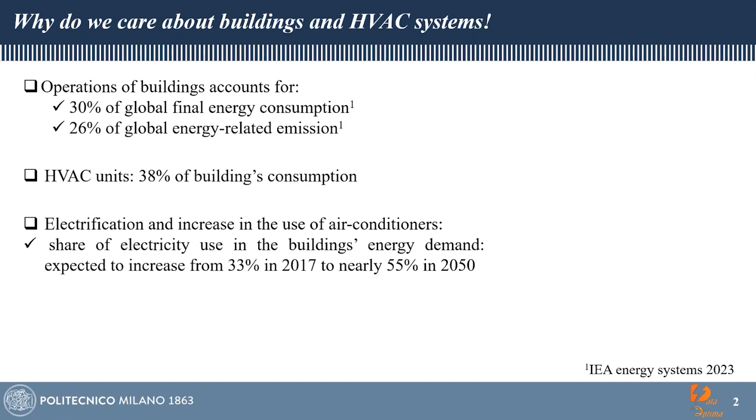And the problem is that it's getting worse, right? Because we are going to have some immigration toward more urban areas. At the same time, we also have - and that's what we're going to discuss next - an increase in the share of electricity demand within the final energy use of buildings. And this is due to the increased use of air conditioners and, of course, electrification.

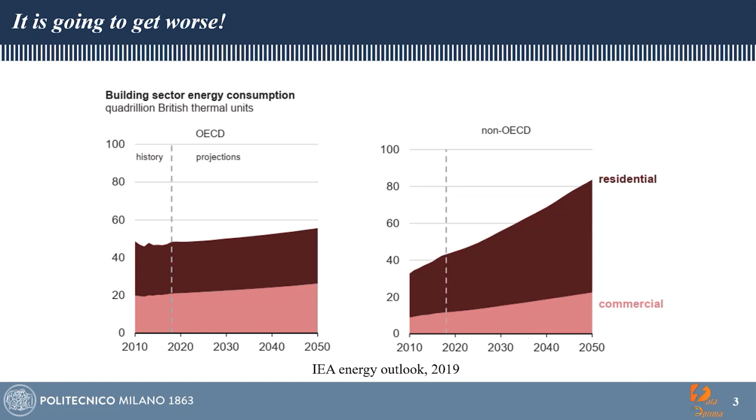So these are the projections. Let's first look at it from a global level. I'm using the energy outlook of 2019 because the values and projections haven't changed much, but I believe this representation was better for this purpose. We can see that the overall global energy consumption of buildings is supposed to increase substantially, specifically in developing countries.

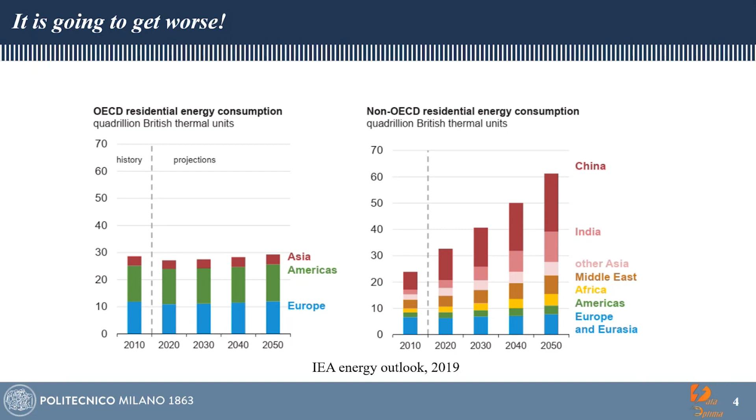If you want to divide it into different sets of countries, this is what we actually expect, because we are going to have a substantial increase in cooling ownership, specifically in China - a very significant increase. Same in Australia, also in India. And apart from that, we are going to have more floor area per person. That's what we would expect, and it could be projected even further, which would also result in an increase in the consumption of buildings.

So this is, let's say, the global part. Let me go back and finish it. If we think about developing countries specifically, that means a lot of pressure on the local grid. From the power engineering side, that's what power engineers are going to deal with in the upcoming years, same with energy planners - because either you need to empower the grid completely, which needs huge investment, or it will completely block the sustainable development of the country. There's no other way. And that's actually what we are searching for: if we can find some sort of alternative.

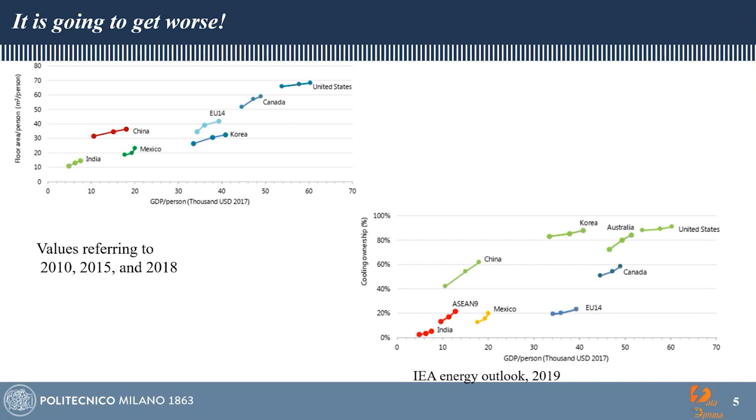The specific case of Norway, apart from the fact that it's a developed country - the main specification is that the heating sector is mainly electrified because of hydro, for historical reasons. Electricity used to be very cheap in Norway, and also considering the capacity of the hydropower, it was a meaningful choice.

Because of that, the building sector already contributes to around 57% of the electricity used in Norway. Out of that value, we have around 51% for space heating and around 9% for domestic hot water generation. So putting everything together, 35% of the national electricity used in Norway is used only for heating.

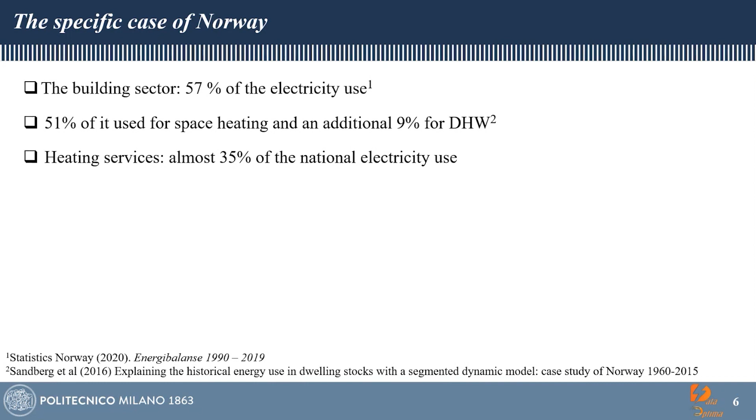So we saw it both in a global context and then the Norwegian context. But the problem is that usually we never hear about it. Whatever you hear about on the news, political discussions, nobody talks about that. Everybody is talking about very specific green hydrogen generated somewhere in the ocean and brought back with autonomous ships, but nobody talks about heating, and that is both in a European context and in a global context.

The reason is that it's not good to talk about it first, because everybody thinks it's super optimized and that we have already reached saturation in terms of reducing emissions. That is completely wrong. You've seen it in Italy, we've seen it in Norway - there is significant room still to invest in this. We still have very large electric boilers in Norway that could be replaced by heat pumps. Everybody knows that, and still they are not given the priority they should be given.

The same goes for, of course, an even worse condition in Italy. We have significant inefficiencies in terms of how things work. So this is in terms of the weight that the elephant in the room has.

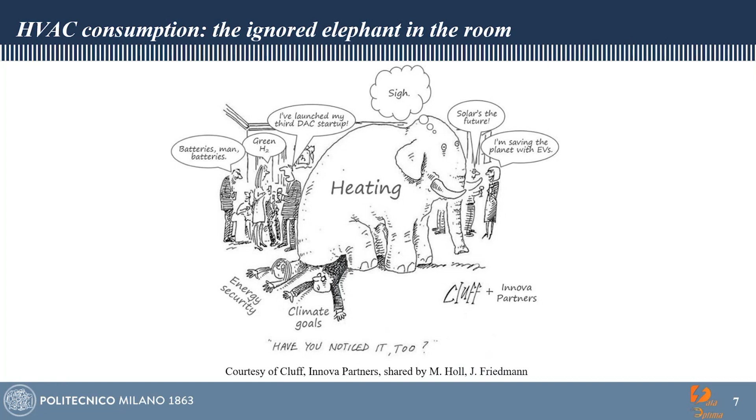And apart from that, you have a second problem. That second problem is that we have these two cool ideas: we want to add electric vehicles - for Italy it's more a cool idea of the future, for Norway it's already in place - and then you have PV generation, which is more common in Italy now, and there are also significant initiatives in Norway to have more residential PV installed.

The problem is that the grid would tell you: you have substantially variable generation, some consumption, you never know where it's going to start and where it's going to end. You can have significant volatility in terms of consumption. And the grid can ask, what is this circus? Because who is going to balance all of that?

So apart from the previous problems we already had - volatility in the load that we had to balance, some wind generation here and there that we had to balance - now we also have this little solar generation, completely decentralized, that we need to balance. We have the EVs and electric vehicles we have to balance. And who is doing that?

That is the problem. Either I have some stable generation - in Italy we have thermal power plants for that, which is a terrible choice, and we are talking about all of this for our sustainable development and a carbon-free future - and then, to balance that, we end up using what we call dirty thermal power plants. So that is the consequence.

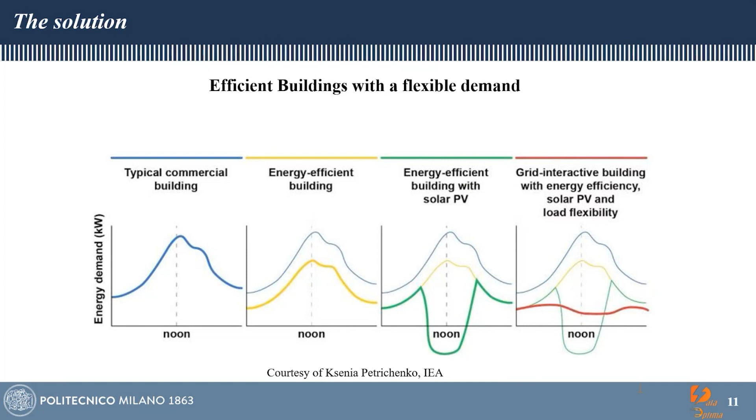So building auditing. I want to find out where these non-efficient buildings are to act on them. But the problem is that building auditing is a very slow and costly process. You need to go there, do the whole auditing procedure, preparing the report.

That's why some municipalities have problems with that, because the rule imposes that you need to do auditing every 10 years, correct me if I'm wrong. And basically some buildings, they cannot even do that, right?

And of course, in other countries, this regulation is something specific to Norway. There are plenty of countries that don't have that regulation requiring you to update this audit. So we need something that is less costly and more scalable, right?

And that's where we can have this smart, meter-driven remote auditing. So what I mean by that is that if you go and knock on people's house and want access to their mechanical room, that's usually very hard to happen. It's more probable they would invite a stranger to dinner than letting them go and touch their boiler. That is what you can imagine.

It's like that, right? So we need to have a non-intrusive methodology, and that's what we call smart meter-driven remote auditing. So what we want to do is take only the smart meter data and guess what type of building it is, what is the performance class, and how it is operated, so that then I can go and tell them.

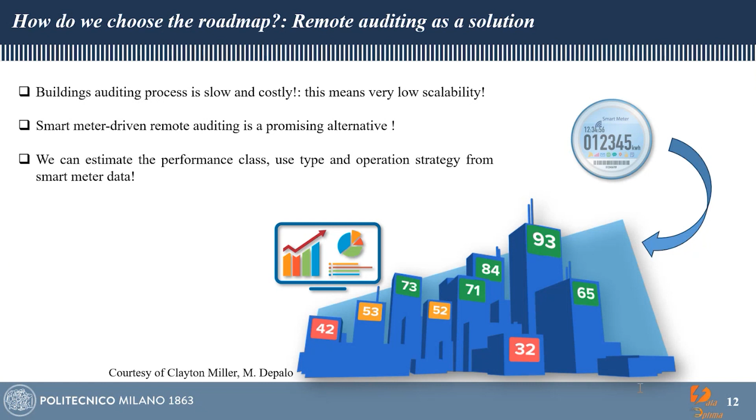Since we're talking about the impact of heating and HVAC consumption in general, we have another useful method: using smart meter data alone to guess the contribution of heating. With that, I can see the possible potential in participating in demand side management, and I can tell them how much they are paying.

In Norway, many public buildings have separate smart meters for the boiler and the rest, but plenty of buildings don't have that. Simply creating that awareness would help them, showing how much they're paying just for heating so they can act on it. You can even guess if something is wrong with their AC without having seen it.

If you have historical data, you can see if consumption with respect to temperature is increasing in an abnormal way. That shows something is wrong with, for example, the heat pump. You can guess it without even having seen it.

You can also suggest, look, you have this PV, you need to apply these modifications to maximize your self-consumption. That's actually why I am here, and that's what we are discussing with colleagues here in NTNU and SINTEF. We are working on similar methods for how to disaggregate the heating consumption, which is the most important goal in Nordic countries.

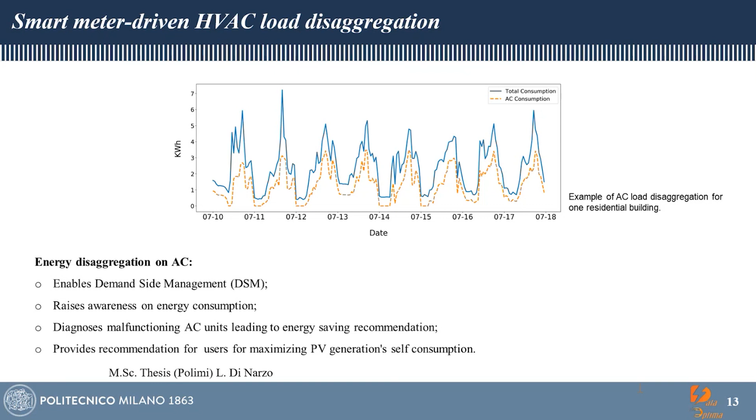Sine is also here, I guess, so she's also doing her PhD on this. We are really enthusiastic about it.

So, until now we've had advertisement only. Let me see how much time - more than 5 minutes, okay, that's very short. I want to extend it a bit, maybe 5, maybe 10 more minutes.

So this was advertisement, and now what we want to see is how these machine learning-based pipelines can help us. I've made a list of the possible uses, and I'm going to talk about this in this presentation, though the next ones I've actually discussed before.

You can use these machine learning-based pipelines both for estimating the duration of flexibility in indoor environments. Italo, who is here, worked on this for his master's and is also working on it for his PhD.

I wanted also to show, as much as we'll have time, what could be the pathway to develop these pipelines. So I would start with this morning ramp-up duration estimation.

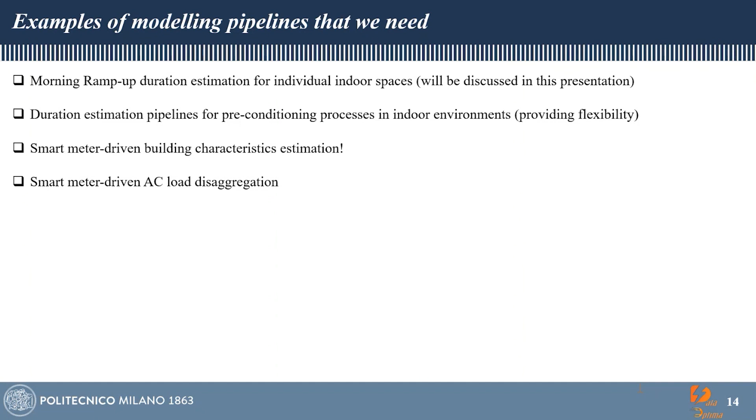What do I mean by that? When I'm talking about inefficiencies, that's the first point. Imagine a medical center with fan coils supplying the rooms. Usually it's managed by turning on the system at a certain time.

It's the same in Norway - you say turn on the whole room, all the rooms, at 4 o'clock in the morning, or at 6. Who chooses that? One guy, 15 years ago. But why don't they change it, or how do they know it's optimized? Nobody knows it's optimized, but nobody dares to change it.

That's the reason - because they will receive a call in the morning. So what they do is choose that time for the worst day of the year. But you can see, for example, that this room would take 70 minutes. What I mean by ramp-up is the time it takes from the existing indoor temperature to reach the set point.

This is not going to happen in Norway because you have much more insulated buildings, but it can go down to that temperature in that building. How long does it take to bring it back to the set point we would like? You can see it's around 21.5, something like that, and 22 degrees, I guess.

And you can see it's substantially different. In January it takes 70 minutes; in March it takes 15 minutes. So this choice of keeping it on - what they usually do is choose the worst case scenario and operate like that the whole year.

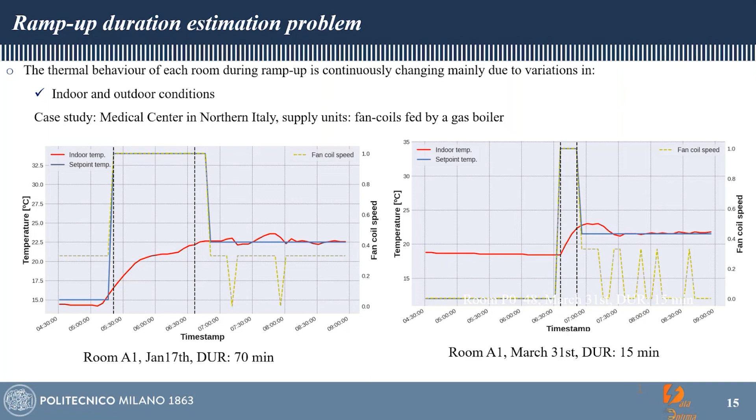Then it could be also two different rooms. The same day, one takes 55 minutes and the other 15, because one is small, the other one is larger, right?

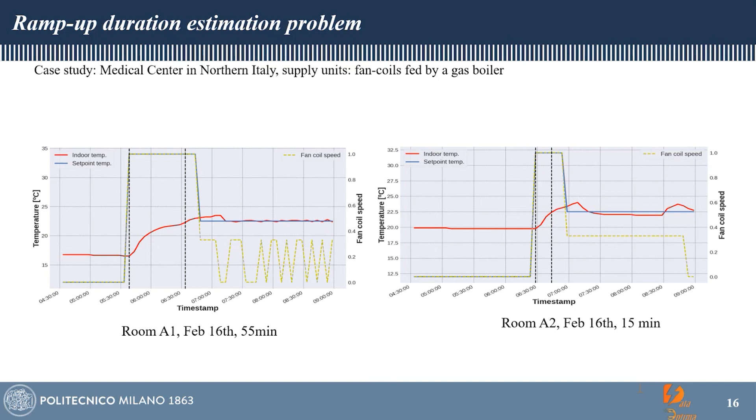So now, how do I solve this problem? The problem is that the first thing that comes to my mind is to use conventional approach. That's what we used to do 20 years ago. Always, as you have a simulation software for each room, you build a physical model, and you design the windows in that model. You add all the characteristics of the walls, and then you guess. You can simulate how long it takes.

That's a terrible idea, because you don't have the material characteristics. Nobody has that. It takes you 2 months to do that, and it's not even rapid enough to be used in real time, right? But why would we do that?

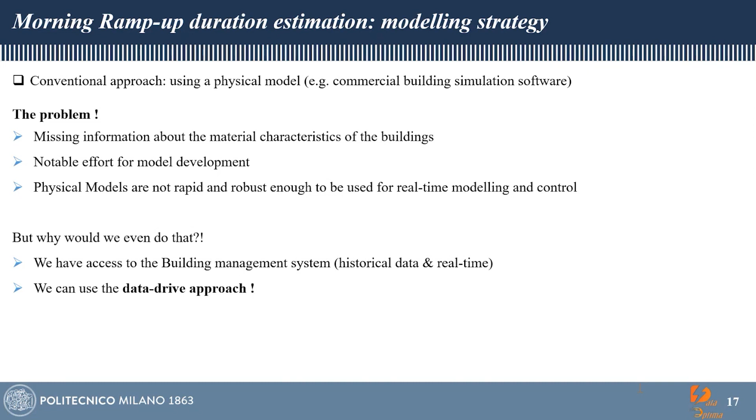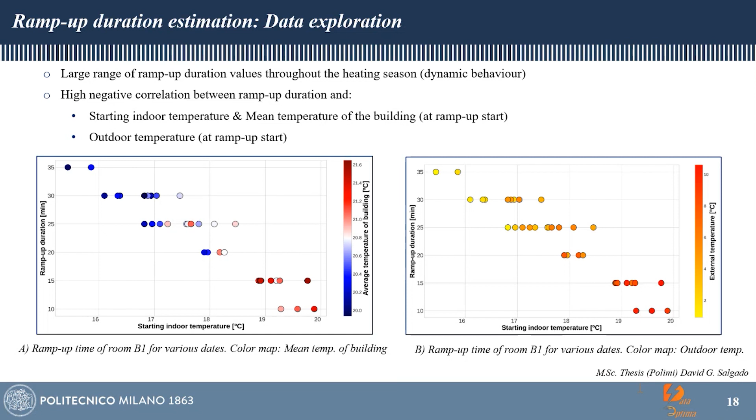Since already we have the data, right? So we know, we can measure the data. We have a BMS. We know how long it took in the last year, every day, every room, right? So what we can do actually, we can see it already here, how variable it is first, that it's changing substantially. This ramp-up duration is changing substantially by the indoor temperature, the starting indoor temperature, what temperature it was, and also with, you can see that for different rooms, it would have different behavior, but it's very variable, right, throughout the year.

How do we do this? We train it with the historical data, right? So we see how it was actually behaving in the previous month, every room, every day. We can train it, and then we can guess it for the next, for the test set, right? So what is going to happen in the future?

How do we do this? We can do it either offline. This means I teach for 6 months, and then I start doing the test. Or that's also a terrible idea. The reason why this is a terrible idea is that things change. So your fan coil can get a fouling, something can move, and you might put like a large computer in this room. So something change by time, right?

So what you can do, you can use this sliding window-based training. So you train based on the last 20 or 10 days, and that's enough, right? So you just say, what happened in the last 20 days? I can train with that and then use it to predict the future, right?

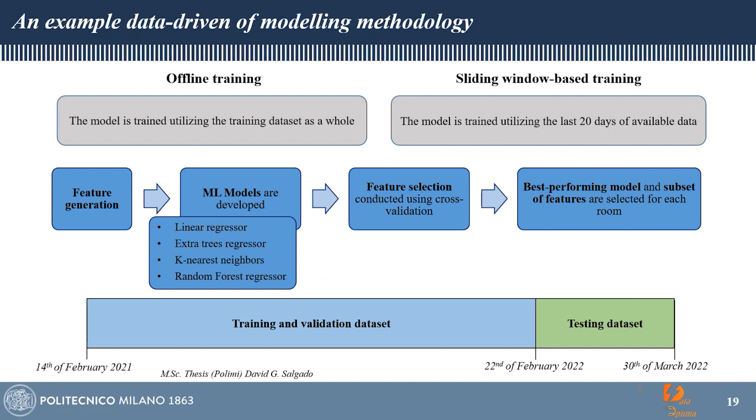And basically, so based on this, what are the inputs of that model? You would choose them. That's why I have added them as physics-based, let's say, features as the title of the presentation, because...

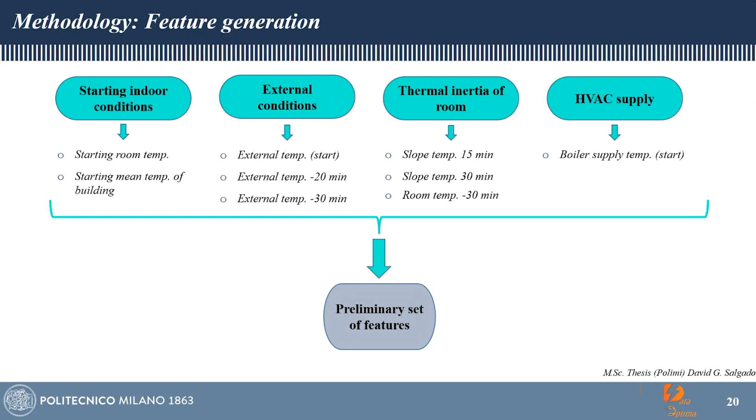Let's say, instead of using a physical model, what you can add is your physical idea of the problem, right? So if the person doesn't have any idea about how buildings or indoor environments work, they would put just the temperature right now, right? But we know that you could consider also like the slopes of temperature in the previous X minutes, right? And also the external conditions with lags, because there is a significant lag in the walls, right?

Actually, I wanted to show you the results here. That's, I think, something interesting. So if we did this feature set, I don't want to go into it, it would take me 3 hours to talk about it. But we did this feature selection, and we saw that the outdoor temperature is not even chosen.

Why? Because the slope of the indoor temperature 30 minutes ago and now actually represents it, right? So why would this method be useful? Because if you do it for you are working on several other applications, I can understand. Once you do that feature selection, you can remove a sensor, right? That's a substantial cost reduction, right? So these types of, let's say, methodology gives you also an edge on that.

Plenty of other stuff, but I think we should start the discussion. Thank you very much.